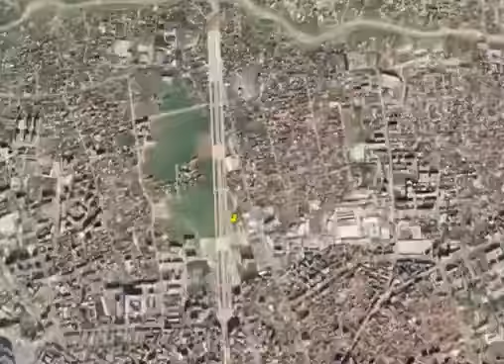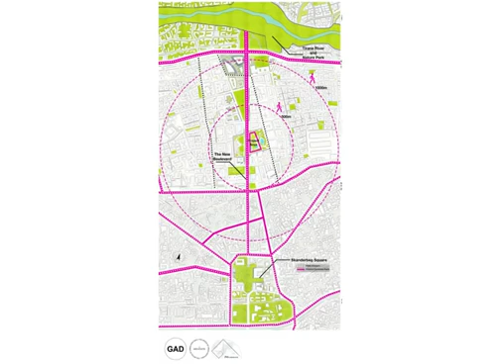GAD, along with PHI and OUD, present their proposal for a new municipal building for Tirana, Albania, as part of the international competition realized in 2020. This project is located in Albania's capital of Tirana on the New Boulevard, the major north-south boulevard that runs through the city. The new municipal building occupies a location on the east side of the boulevard in the existing urban fabric, as part of the new master planning for the city for the 21st century.

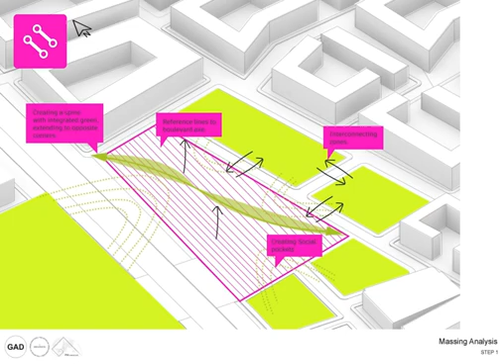The plot that we have taken over is actually on two sides of the boulevard, and our concern has been for public space, public administration, and nature and ecology. As you can see here, we've integrated one side of the plot with the existing street fabric, eliminating the existing buildings to create a large open green space.

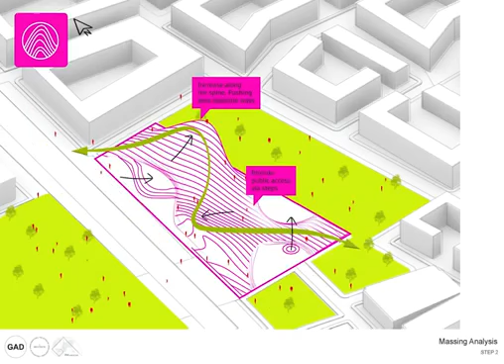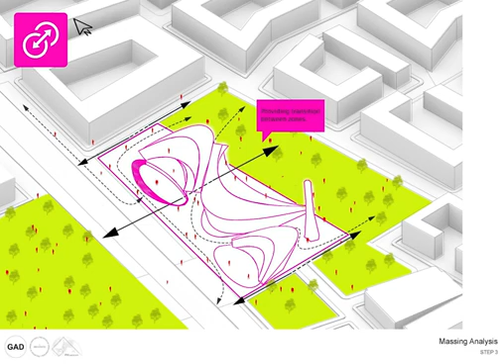Our landscape is in fact a building landscape, a topography that is both nature, landscape, and building at the same time. Cutting through the parcel is a transverse road which connects the east and west sides of the plot, and the building acts as a connector between two different large public spaces. We can see here also that the buildings are humps which rise up from the landscape as a kind of landscape topography.

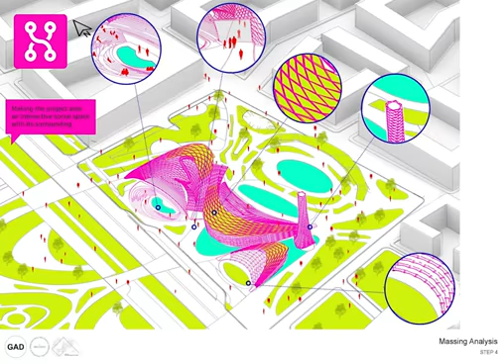So as we can see here, GAD's proposal brings together and merges landscape, topography, and building, unifying it through a consistent geometry, at the center of which sits a canopy covering the main administrative interior public spaces of the building. The building's orientation has been organized with regard to both sunlight and wind direction.

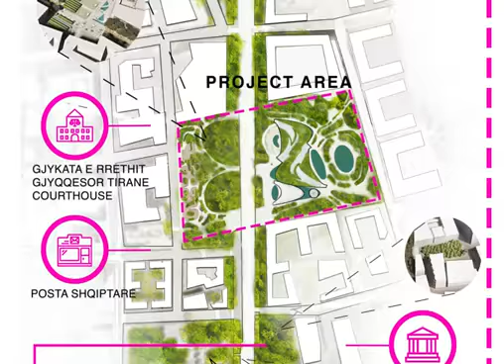The main avenue, the New Boulevard, is the site of some of Tirana's most important public buildings and public spaces, and sitting in the middle of it, based on master planning proposals, is a new municipal building. So the municipal building is part of the emerging public space of Tirana.

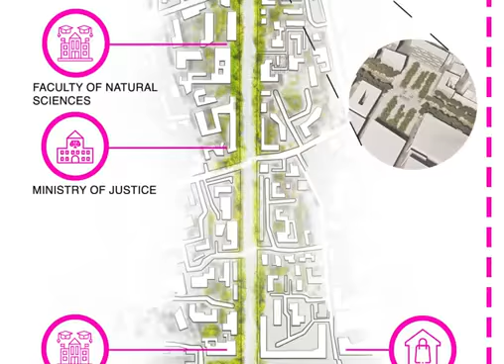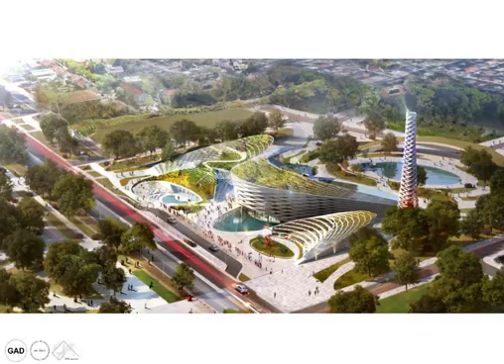The project area consists of two large plots on either side of the avenue. GAD's proposal for the plot is a mix of surfaces, landscapes, and topographies, unified through a common geometric and formal language.

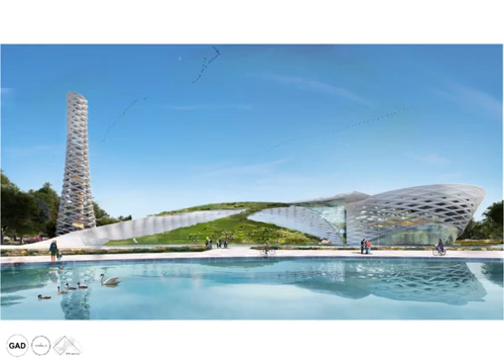The exterior facade acts as both facade and roof, and visitors to the building will be able to climb into and on top of the building, making it part of the topography as well as part of a natural park area in the center of the city.

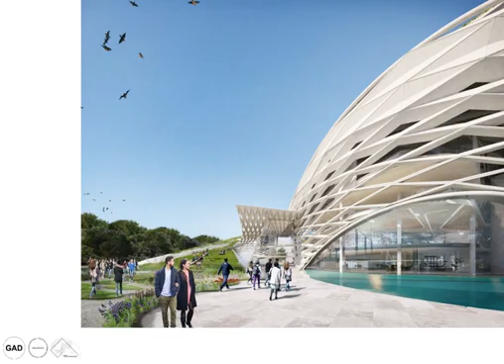This facade, consisting of prefabricated elements, rises up from the ground and then covers the building, but also acts as an interface between nature and the interior urban areas of the building.

In the interior, we have a series of passages, elevated passages, interior passages that connect both the administrative parts of the building, parts of the city government, but are also transparent, allowing users and visitors to see what's going on in terms of public administration here in Tirana's municipal center.

These series of walkways and elevated ramps provide a dynamic urban orientation to the building, giving Tirana a new urban center and a suggestion for a new urban architecture.

The integration of the roof-cum-facade is done through a system of steel and glass prefabricated elements, but also acts as an important part of the sustainability and ecological issues of the building.

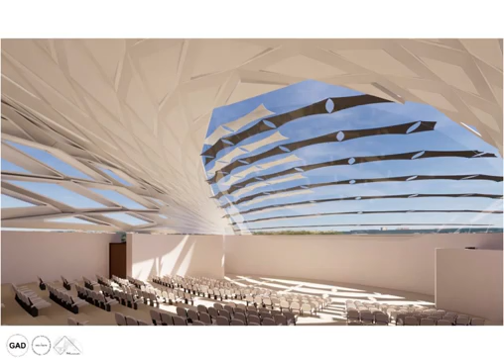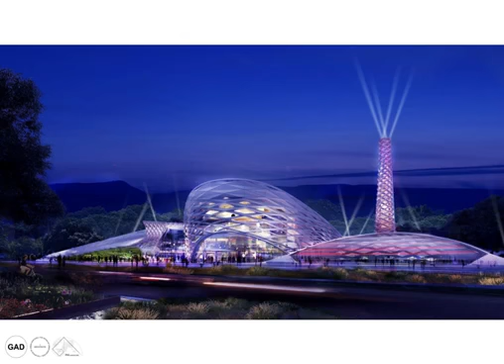The main city council space is open to the outdoors and to sunlight, with modulation provided by a series of flexible canopies. At night, the building changes as light from inside moves outside, creating a dynamic urban center in the middle of the new boulevard and in the middle of Tirana.

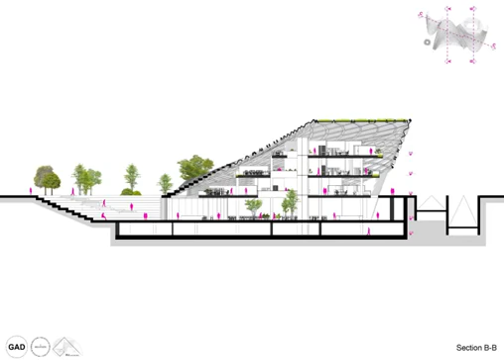The building consists of 5 floors: 1 floor below grade and 4 floors above, all covered by the roof canopy as a separate layer. The main structure underneath is below grade, and the basement floor connects all these disparate functions, allowing for circulation and service below ground.

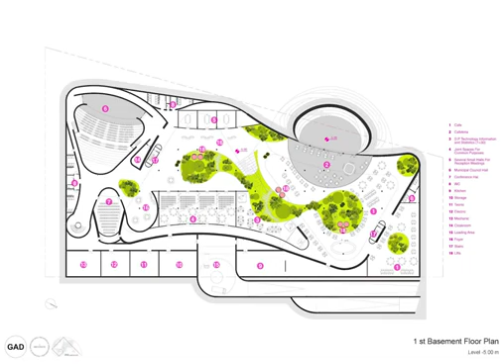In the floor plans, we can see that the bottom floors, the basement and ground floor, are public areas including public gardens, cafeterias, and other social spaces connecting to the outdoor exterior areas. On the north side, an outdoor amphitheater connects into the cafeteria area, creating one common space usable in flexible ways throughout the year.

The upper floors are for the directorates of the city government and the mayor themselves, but ultimately the public will be able to climb on this roof canopy, so that these functions will also be transparent to the public.

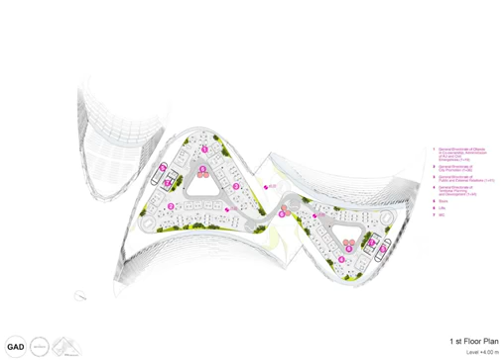It's important to mention that the building has a number of features for zero emission and sustainability. These include, starting from the roof, photovoltaic cells.

Internal air circulation, natural circulation—the hot air rises up. There are gaps within the honeycomb structure at the top to allow this hot air to be expelled out of the building. There is a rainwater collection facility that collects rainwater on the roof, bringing it in and recycling it.

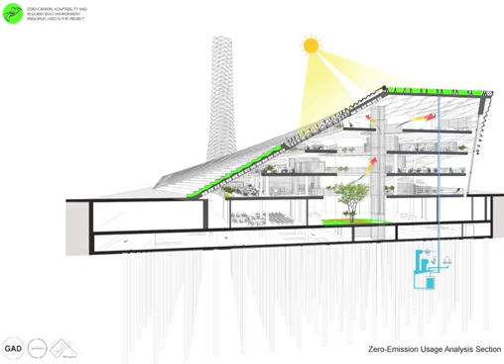And lastly, below the building, in order to manage heating and cooling, there are a series of pipes reaching into the ground to manage overall heat gain of the building.

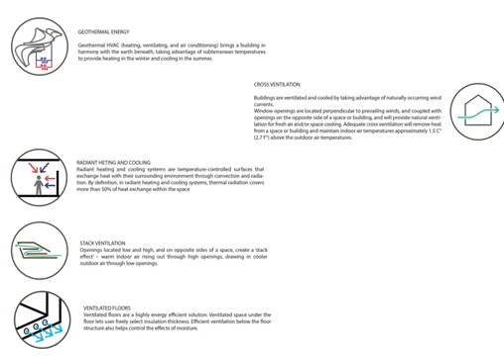Taking a view from outside the building, walking, we can see that it's firmly integrated into the urban fabric of Tirana today, but creates a new natural topography in a monumental way, so that we all know this is a building of importance to the city, while allowing citizens to use this space for activities, sports, and to appreciate nature.

At the same time, the building is open to the exterior. The building is transparent, the facade is transparent, and allows all the activities of city government to be viewed by the citizens of the city.

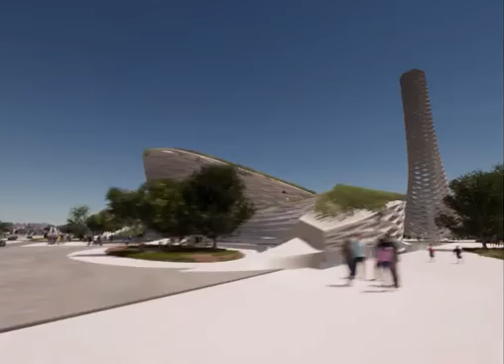Our proposal calls for the use of the plot across the boulevard, so we have pulled this together into one concept such that the nature of the city is preserved and in fact extended, at the same time as new public functions are created.

We believe that city government is not about administration but about creating services, such that our new municipal building is in fact a center of public service.

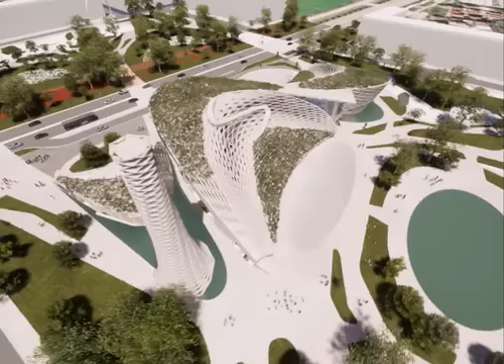The outdoor areas, such as a pool, bicycling areas, amphitheaters for concerts, agoras, we feel position Tirana for the 21st century as a new form of municipal administration, but also as a new form of urban life.

Zooming in here on this facade, it's a very active facade. It brings together many zero emission factors, creating a sustainable building, but at the same time provides a dynamic, organic geometry for a city that otherwise has an urban fabric of blocks and squares.

We feel that this looser, more flexible orientation sends a message to city dwellers that this administration and this building is something new and future looking, something innovative.